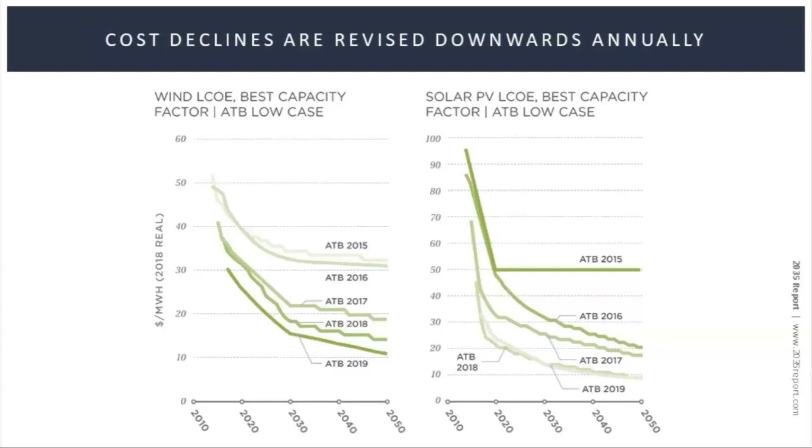All our results are really driven by cost assumptions, and we just want to be transparent about our cost assumptions. What this figure shows is our cost assumptions and cost projections. It shows that most of the cost reductions for solar, wind, and battery storage have already occurred. So our analysis doesn't rely on dramatic cost declines in the future.

What we essentially did is use NREL ATB 2019 cost projections as the basis for our cost projections. Our base case cost projections are essentially the NREL ATB mid case in 2019. However, we used the NREL ATB low case until 2021 because actual costs seen in PPAs matched the NREL ATB low until 2021. For the future cost reductions, we use the NREL mid case. And it turns out that the NREL ATB 2020 mid case actually matches our base case cost assumption pretty nicely.

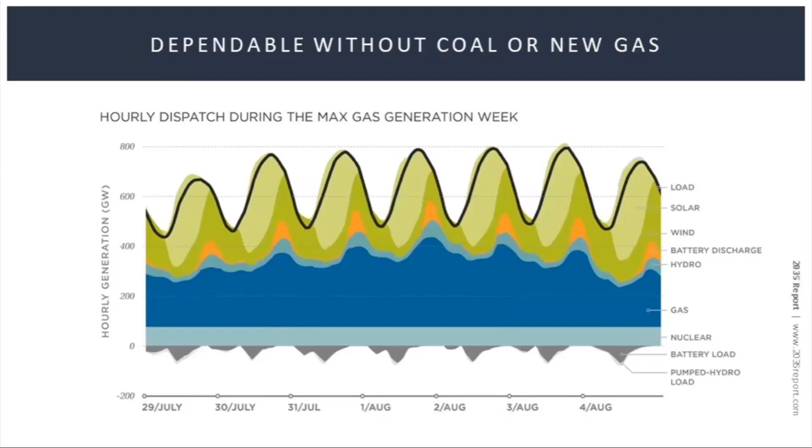And what I'm showing you here is one of the worst weeks in that 7 weather year simulation. During that worst week, the wind generation drops as much as 70% to 80% of its average value. And the grid is managed by a combination of 350 gigawatts of existing gas generation, 150 gigawatts of storage, and the rest is essentially hydro and nuclear. And this represents a conservative way of balancing the grid. There are several other options, including demand response and a few other things that can further optimize this picture. So what it tells us is that the infrequent use of existing gas assets is critical to balance the grid, but also about 150 gigawatts of storage makes a lot of difference.

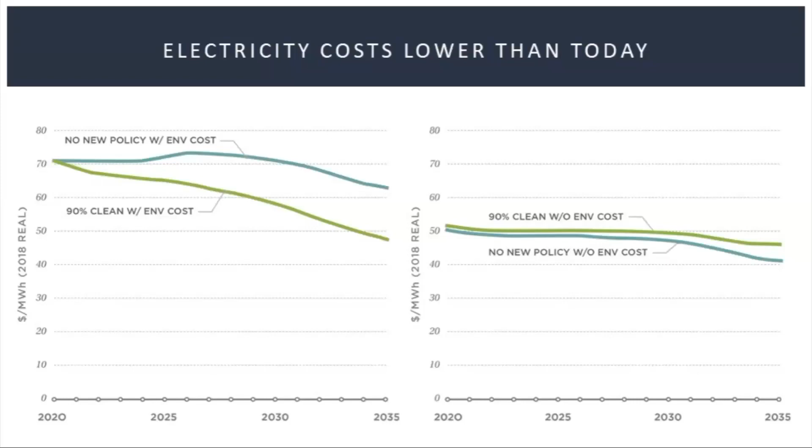Here is the result that in fact is most exciting to us, which is the cost results. What we are finding is that the wholesale costs of the 90% clean case are actually lower than today, although they are slightly higher than the unconstrained case. Now the wholesale costs include the generation cost, but also the incremental transmission cost. So they are below 5 cents per kWh, which is very exciting news. Today, wholesale costs are about 5 cents. In the 90% clean case, including incremental transmission costs, the costs are 5 cents. And we also consider the environmental benefits of this case, which are shown on the left-hand side. If you consider those, then the 90% clean case is overwhelmingly beneficial. We find that we avoid about $1.2 trillion of environmental damages up to 2050 in the clean case.

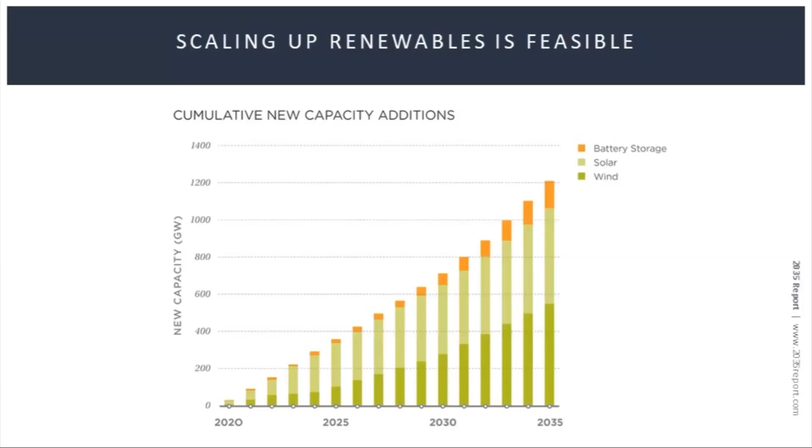This is ambitious, but we argue that it's feasible. It shows the build-out needed: we need to build more than 1,000 gigawatts of renewable capacity. It requires basically a 2 to 3x acceleration in the build-out of renewables compared to what's happening today. But because renewables have become cost-effective in most regions of the U.S., we argue that this is feasible. And equally importantly, we do an analysis of the impact on net jobs, and we find that there is a significant increase in net jobs supported. We find about 500,000 net jobs every year being supported in this case.

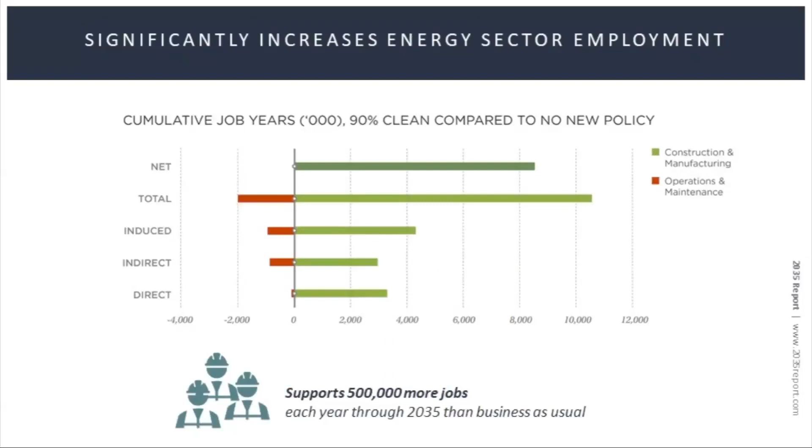So overall, we find that it's an incredible economic recovery opportunity, because what we are saying is you could go 90% clean by 2035 without increasing consumer bills, maintaining the grid dependability, and also offering an incredible opportunity for jobs, as well as significant savings on environmental damage costs, which disproportionately fall on poor and disadvantaged communities.

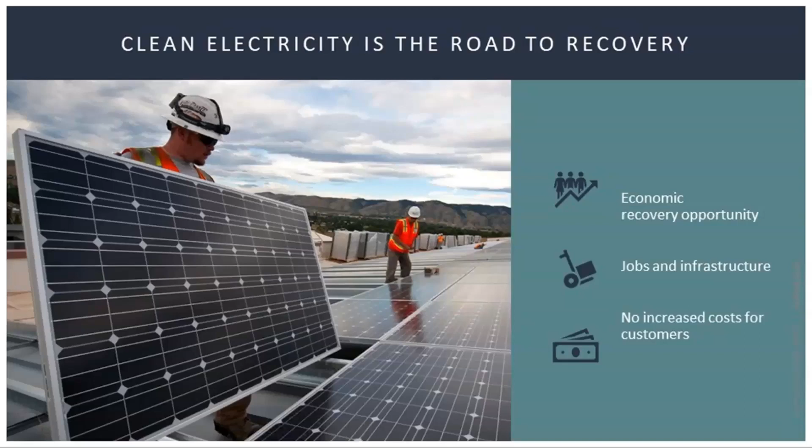The overarching recommendation of our report is that investment and tax credits alone will not get us there. We need to adopt a national clean electricity standard that codifies a 90% goal by 2035 with interim goals every 5 years, and also gets to 100% by 2045, which, given the time between those two goals, we think is feasible.

Again, as Amol pointed out, there's kind of a knife edge of cost, and even though there's customer savings to be had from achieving this goal, we need to codify it in order to make sure that all states are getting there. Something that's also going on, of course, is that states control their energy mixes and can create subsidies or extend the lives of fossil assets. So we need to have a forcing function to get monopoly utilities and markets to come along.

So one of the biggest challenges of achieving this vision for the grid is ramping up deployment of renewables to double historical maximums in the 2020s and then triple historical maximum deployment rates in the 2030s. So we have some recommendations for how to overcome those barriers. And I will say, the urgency of this is really increased as we consider electrifying other sectors at the same time. But I don't want to get ahead of ourselves. I mean, this is already a really important step and a really ambitious goal.

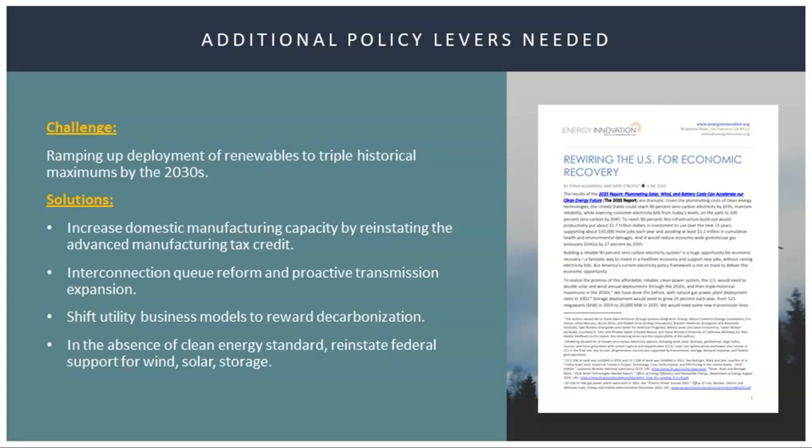So the other big challenge is how do you facilitate prompt and efficient coal retirements and also investment in flexible resources, whether that means keeping most of the existing gas fleet around, but for a much different purpose, as well as investment in storage resources, demand response, as Amol mentioned, and potentially new sources of flexibility.

So one of the big items that I know is on ESIG's agenda is wholesale electricity market reform. There are practices that are allowed in wholesale markets and also market designs that are clear barriers to the transition toward a more renewable-centric grid. Self-scheduling is one. Capacity market design is another, and we need new products and to reform price caps and other ways that prices are formed to support a complementary portfolio of flexibility resources.

And then we really need to make sure that price responsive demand can participate more meaningfully in wholesale markets, and also deal with rate design so that individual customers can participate.

Another big issue is uneconomic coal assets that are on monopoly utility books. Someone has to pay for those costs, and we can really reduce the cost of transition by providing debt financing, whether it's at the federal level or states can undertake ratepayer-backed securitized bonds to pay down the cost of those assets in order to get them off utility books, so these uneconomic coal plants are no longer earning for utilities, so that the next question becomes how can they invest in a clean electricity future, not what will they lose by doing so.

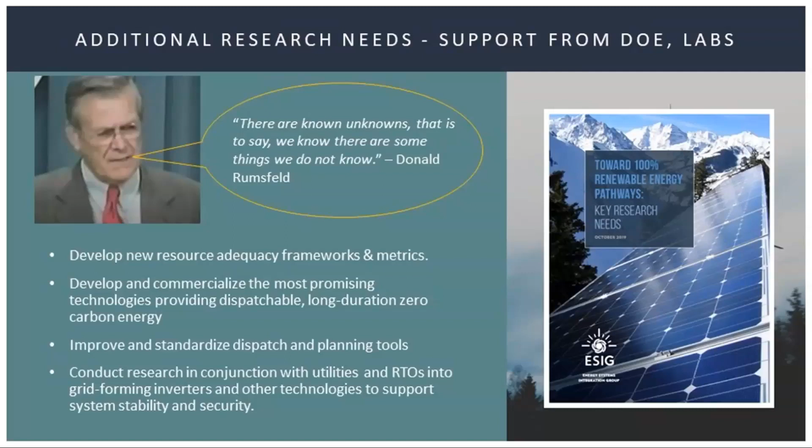So that's the end of my presentation. Thank you all. It was kind of the honor of my career so far to work with the folks at UC Berkeley and Amol's team on this report. So I'm just glad to be a part of the conversation.

Great. Thank you so much, Mike. And it was great to work with you.

I think a lot of you will see in those policy recommendations things that you are pretty familiar with, right? In terms of resource adequacy, restructuring, interconnection queue reform. So things that a lot of people I know at ESIG and probably listening to this webinar are working on today.

So now I see there's a whole bunch of great questions coming in, and a lot of them I think Paul is going to address in his presentation. So we gave Paul the hard set of questions, which is really the last 10%. Now remember, what Amol presented was 70% variable renewables, 20% what we call firm low carbon, hydro and nuclear, and 10% gas on an energy basis. And Paul's going to really talk us through what are the issues that we need to deal with on the last 10%? And I think a lot of the questions coming in are really going at this.

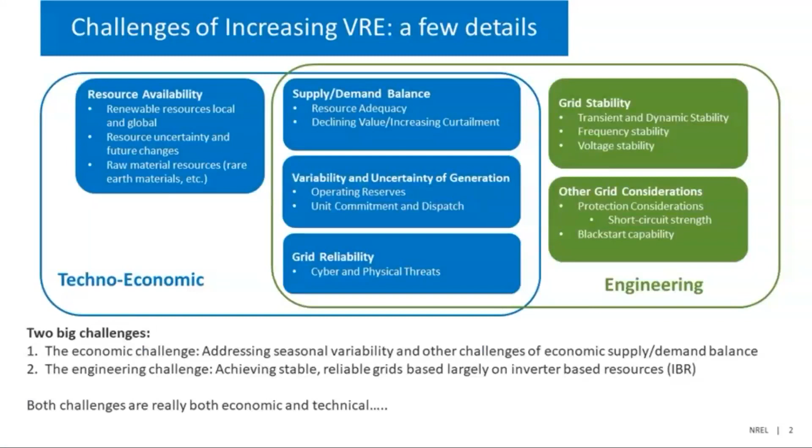But when we talk about the last 10% and the penetration, I like to think about it in this term, because I've been doing this long enough that I remember when we couldn't go beyond 20%. Just Google it. You will find quotes from utility executives that say we cannot go past 10 to 20%. And they'll say it's a hard limit or we have to do all kinds of crazy changes. And we know that's not true. And so now we know that we can do a lot more. So we think about 80%.

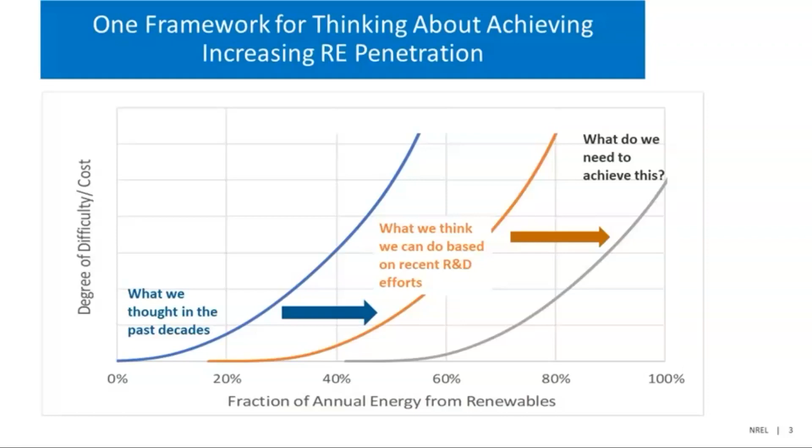So I think this framework is still useful. We just have to be really careful about what we are talking about when we talk about 80 or 90 or 100%. What do we really mean? Is this a technical issue? Is it an economic issue, et cetera?

Okay, so when we talk about the last 10%, at NREL we've been thinking about framing this in terms of these two challenges, something our communications folks came up with. We've boiled it down to this concept of the balance challenge and the inverter challenge. And the balance challenge is really what we're going to be talking about. I'd love to talk about the inverter challenge because I think some of the things like inertia maybe are not as big of a deal as we've thought in the last few years. But the big economic issue is probably this balance challenge, or the mismatch of renewable energy supply and demand.

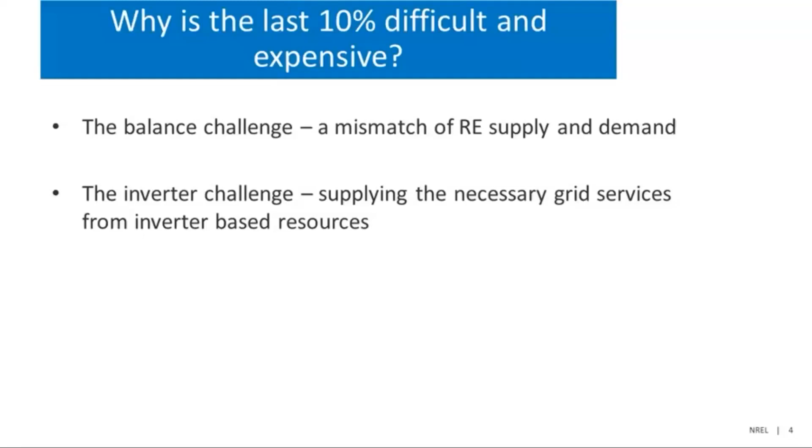Now, when we talk about that mismatch, again, we used to think about short-term variability. Oh, the sky is falling because we're going to need massive amounts of operating reserves because of wind and solar.

And we know that because of the spatial diversity and because of the fact that you don't drop 1,000 megawatts of PV in a minute. Clouds just don't move that fast. Wind fronts don't move that fast. It's less of a regulating reserve problem than a flexibility or ramping reserve problem, and that's just a lot easier to solve. So, that gets us past those issues that we used to think about at 10, 20%.

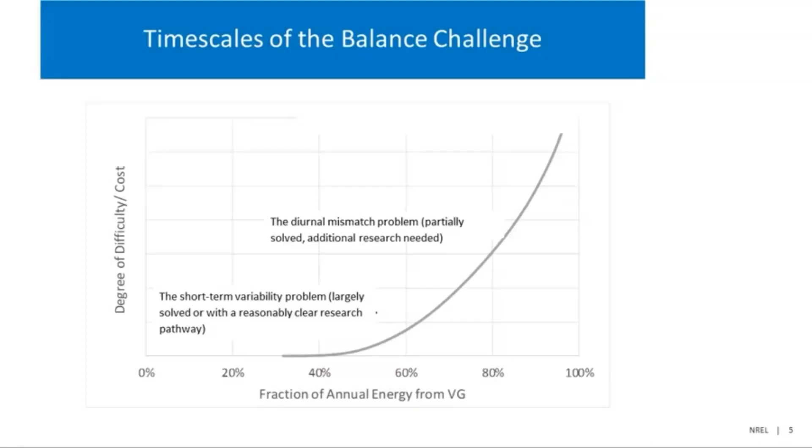And then we move into the diurnal mismatch problem, the fact that the sun doesn't shine at night, the wind tends to blow more at night. That's where, quite frankly, the reduction in cost of things like lithium-ion batteries and spatial diversity really helps us solve that problem and move us into that regime of 80 to 90%. And so I'm not going to talk any more about that because, again, those are well on their way to being solved problems. It really comes down to what happens beyond the diurnal problem.

We used to think about renewables as being these must-take resources. So you'd have these crazy things like utilities keeping thermal generators partially loaded just so they could maintain upward or downward operating reserves instead of getting that from renewables. And I think we're moving past that.

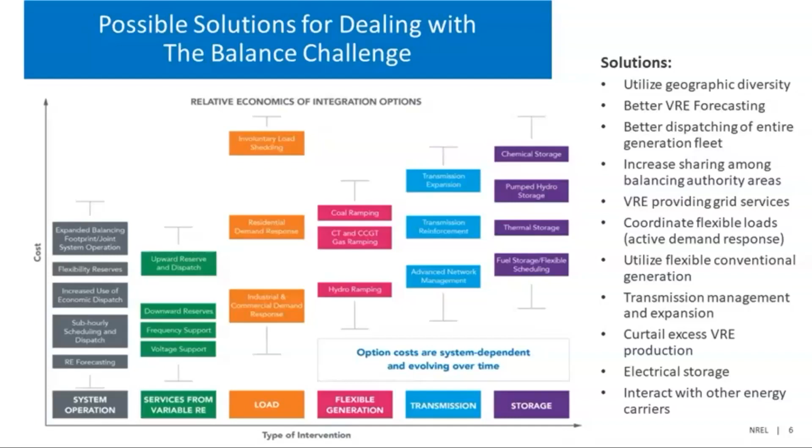So it really comes down to, okay, we know how to solve these diurnal problems, or we have pathways forward. I'm not saying these are solved problems. I'm not saying we're going to be at 80 or 90% tomorrow. We have to implement these technologies, and quite frankly, under even aggressive transitions, we're looking at a multi-decadal transition towards the point where we have to deal with the beyond diurnal mismatch problem. So that really leads us to this seasonal problem. And so the question is, okay, what is the problem here, and how might we solve it?

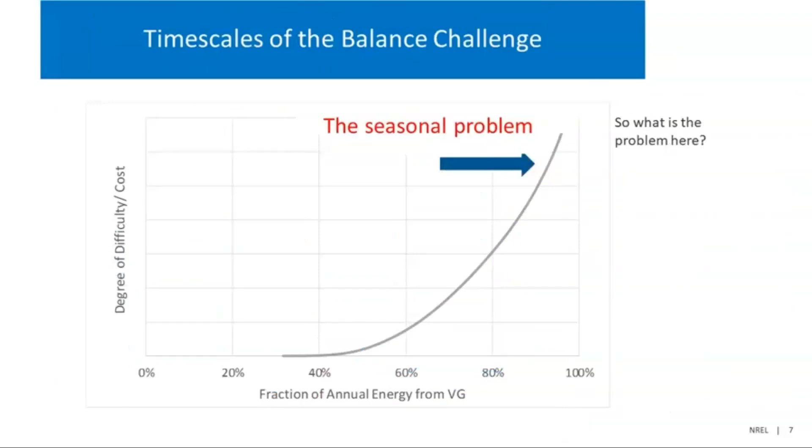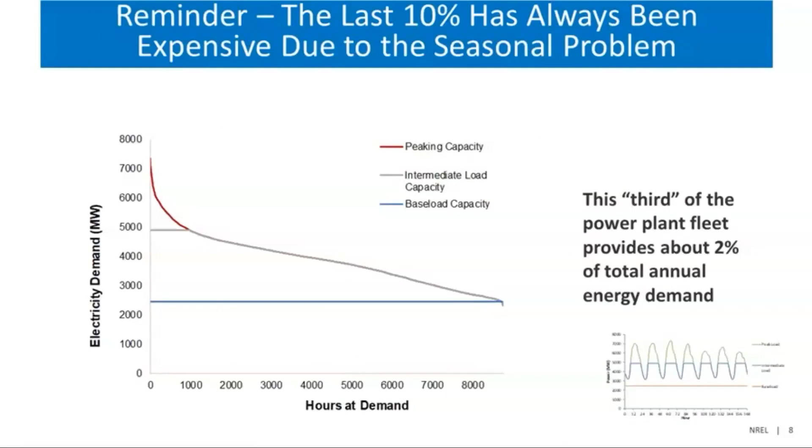So just real quick, I know you all know this, but just as a reminder, because I do get a little frustrated when people talk about the last 10%. The last 10% has always been expensive just because you have to build a ton of capacity with very low capacity factor. So when you do your LCOE calculation, figure out what a baseload plant costs, and then look at the last 10 or last 2% of demand, even if you're doing it from gas, it's still going to be a lot more expensive than your quote-unquote baseload plant.

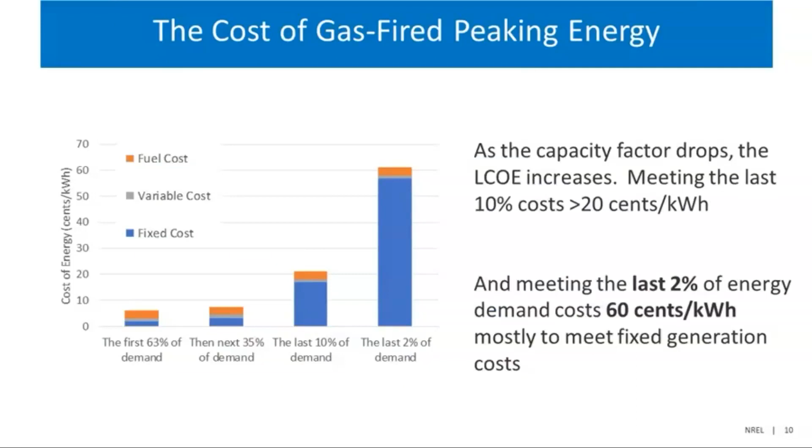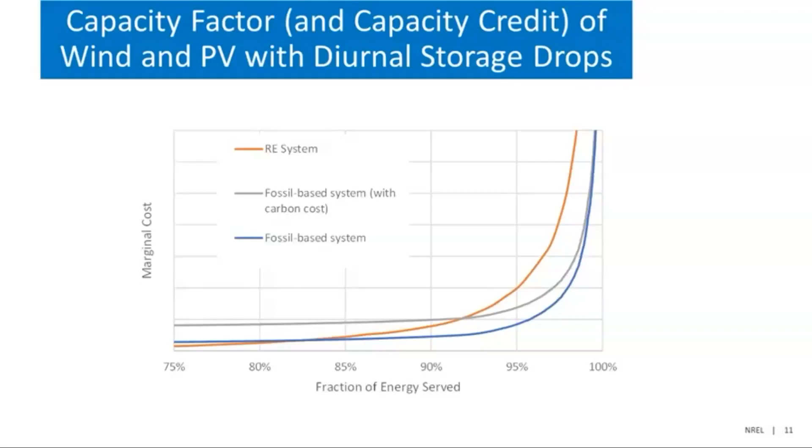So the problem, of course, is that diurnal mismatch has been solved, and now we have run into that seasonal problem. This is an example of a bunch of 95% scenario systems showing that seasonal mismatch. It's the fact that we've got too much generation in the spring that we're throwing away. We can't do anything more with diurnal storage. You can see that there's no diurnal variation between the orange and the blue lines.

The orange is what's left. The blue is what's got available. Now you can see in Florida, maybe there's some diurnal. What you want to do is shift the blue into the orange. But for most of the time, look at Texas, look at California, you got tons of renewables available.

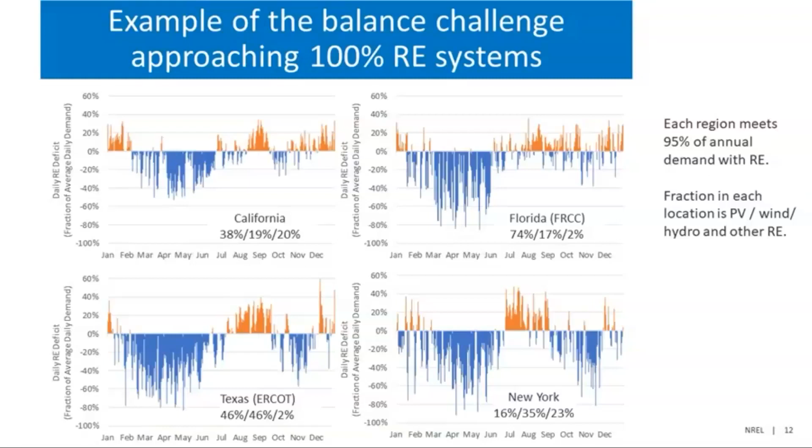You're not going to store it diurnally because you'd charge up your battery in May and you'd sit there and wait until August to discharge it. So the capacity factor has dropped to incredibly low numbers. The costs, like I showed in that previous slide, rise dramatically. And so this is the seasonal problem in a nutshell. And the question is, how are we going to solve this in fully decarbonized systems if you want to do it all with renewable energy?

So I would say that there's three classes of solutions that people talk about. One is continued push on renewable energy and diurnal storage. The second is demand response. The third is seasonal storage. So maybe a fourth. So just really briefly to talk about each.

The first is, how far can we push this idea of just building out more wind and solar and curtailing it? Maybe you get a PV plant with a 5% capacity factor, wind plant with a 10% capacity factor. I mean, if you've got 1 cent wind, 1 cent solar, and storage that's way under $100 per kWh, maybe that's fine. I don't know. It's hard for me to see it much past 95%, because really, you look at the marginal costs, they get really high, but we don't know how far we can go. So that's one question: how far can we go without seasonal storage?

But again, this isn't my expertise, so I just have no idea whether or not you can actually do seasonal shifting with industry. Again, you really need a low capital cost, high variable cost type of industry, something with capital costs really cheap so that a reduced capacity factor, not running that plant 24/7, makes sense. Again, I think we need to do a lot of work on this topic because maybe this is the answer and we don't understand it well enough.

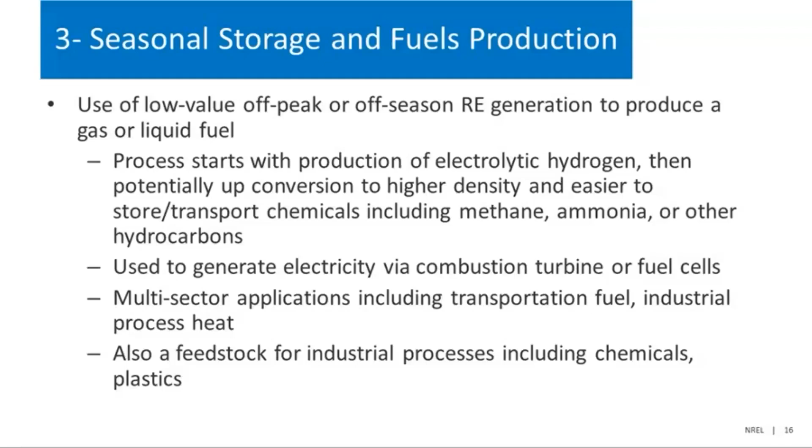So how much of the hydrogen we produce for seasonal storage is actually going into the electric sector? Maybe 10% of it. So we're going to have to get way smarter about this multi-sector analysis to understand whether or not all this stuff makes sense. Okay, so there's the three options, but let's talk about a fourth.

We just heard 90%. If we do 90%, we heavily electrify transportation, we heavily electrify everything else. Are we done? Should we just stop and say, okay, fine, maybe if you really need more carbon, you go with CCS from fossil, direct air capture, biomass CCS, and get negative carbon. I don't know, but again, when we were talking 15 years ago of getting to 10 to 20%, now we're talking about 90. That makes me pretty happy.

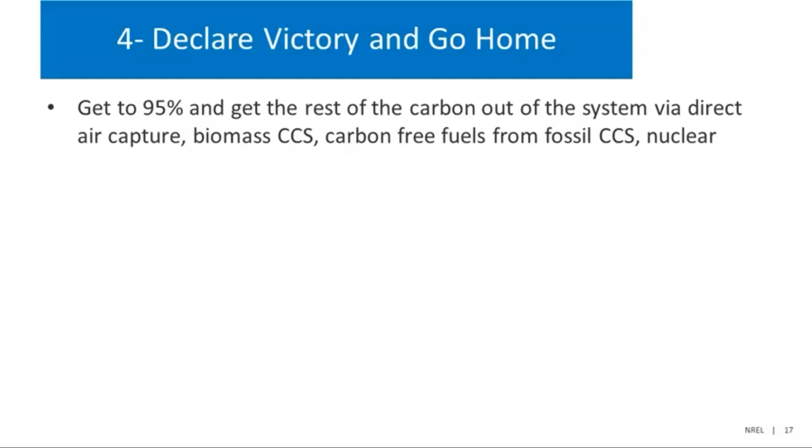Yeah, and I think 100% is a really important and aspirational goal. But if we got the electric sector down to 90%, the electric sector would now just be roughly 3% of economy-wide greenhouse gas emissions, at least just talking in sort of the U.S. perspective. And so at that point, if you really care about the marginal cost of carbon abatement, you should be really focused on other sectors.

And that's, I think, part of the point of our 90% study was like, let's move as fast as we can, get as much carbon quickly and cheaply out of the electric sector as we can, and leave the last 10% for, like you said, this complex solution set. How's it going to work? And luckily, we have the Energy Systems Integration Group that is thinking holistically about this.

And luckily, we also have Professor Mark O'Malley from Europe, who's going to talk about how they do seasonal storage. They call it the entire continent takes the month of August off. So I think that's how they deal with serving industrial load in August, right?